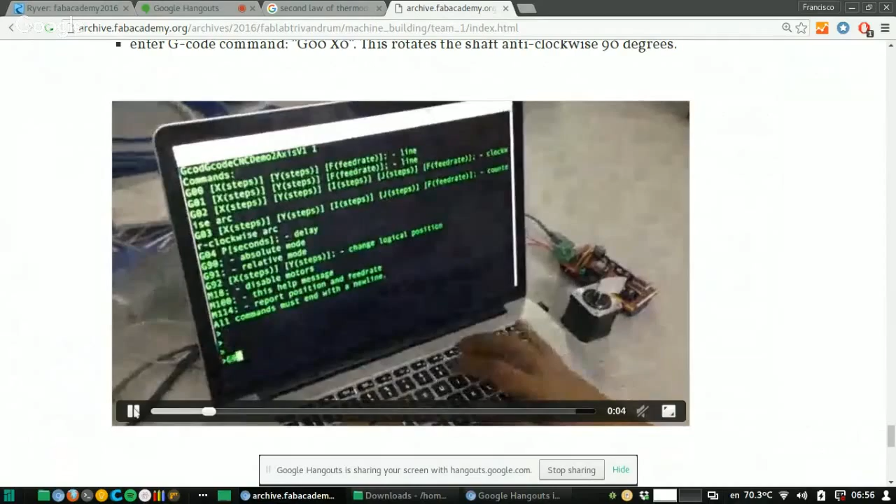No, the one you're seeing on the right is just us testing out the code that it works. The video on the left in Ryver is the one actually drawing the fully assembled machine.

No, this is my thing. You're executing G-code? Okay. No, Francisco, if you go into Ryver, just open Ryver. Open what? Ryver in Trivandrum channel. I've posted the MP4, the final MP4, which you can view.

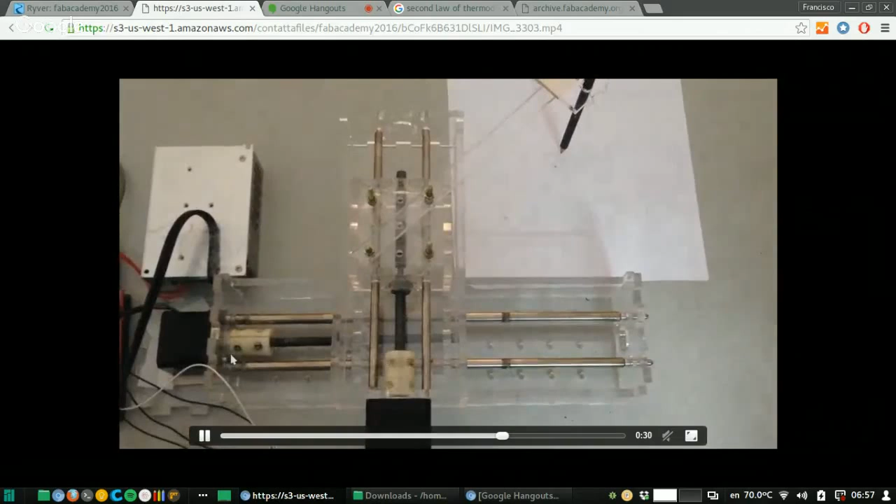And you can see faintly that it's drawn a square. So this is done through G-code. Yes, we got a G-code, and I'm driving it through a serial port.

Okay, that is good that you have this working like this. You can present this machine now. Okay.

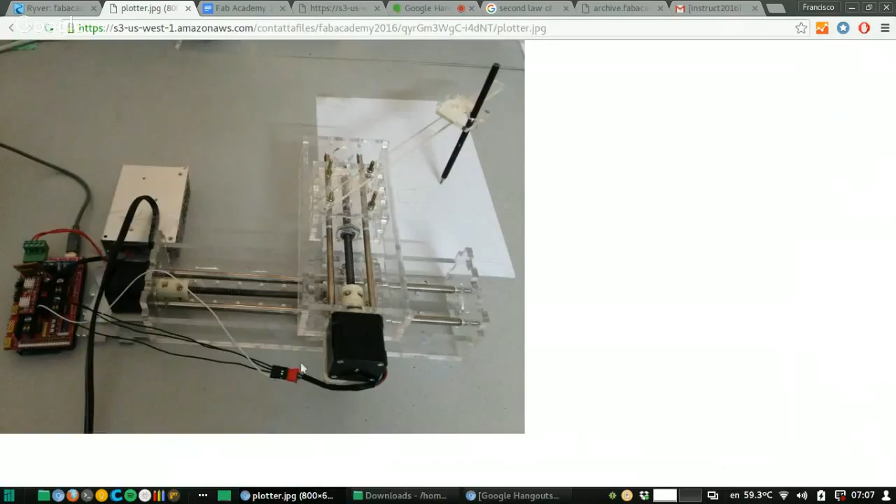Just one warning for this. There is a danger that you are going to fry this board. Why is that? Because you should never, ever remove one of these jumpers while there is power applied to the board. But because of how this is put here, it's very easy for one of these cables to come out, and that will make the driver explode. So please make sure you secure this in a way that there is no chance of accidentally removing this plug or these pins. Sure, we'll do that.

Is this acrylic chassis your own design? Yeah, so Sibu, Jasil, and Rashid did that completely in acrylic, their own design, done in OpenSCAD. These shafts are obtained from what? So they went to a scrapyard and bought scrap inkjet printers, and they used the guide rails from there. Okay, make sure you state that. Yep.

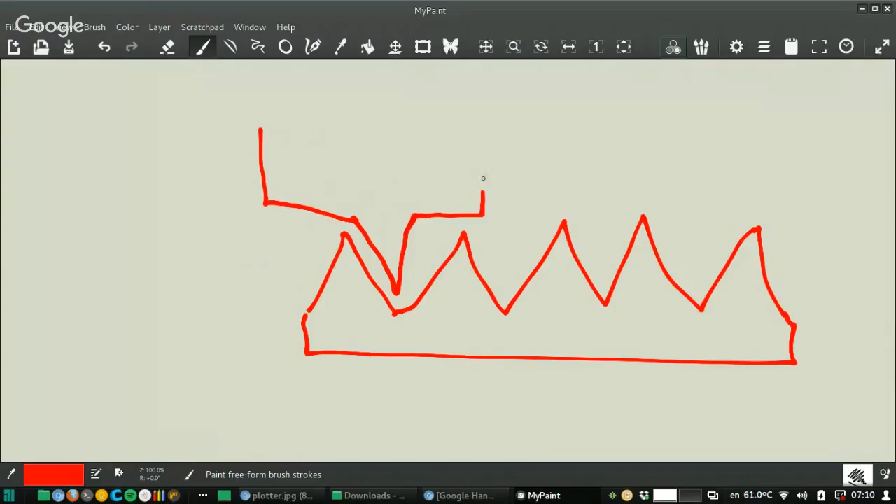How is the backlash? Backlash in the sense of? What is backlash? It's like when you move back and forth, it doesn't move the same distance. There is a certain loss of distance -- it doesn't stop at the same starting point.

Yeah, it's because of this. When you move this way or this way, it's not touching at the same time here and here. So when it moves from one side to the other, you are losing something. Right, so it's actually surprisingly low.

The square that you saw being drawn actually ended up at the origin. If you see, the last point is at the origin, so it's actually done a reasonably good job there. Most of the problems we were having is mostly with the way we are attaching the pen to the arm, and that's a bit loose. Whenever that moves around, it kind of messes up the drawing, but otherwise it's actually holding okay. The tolerances seem okay so far.

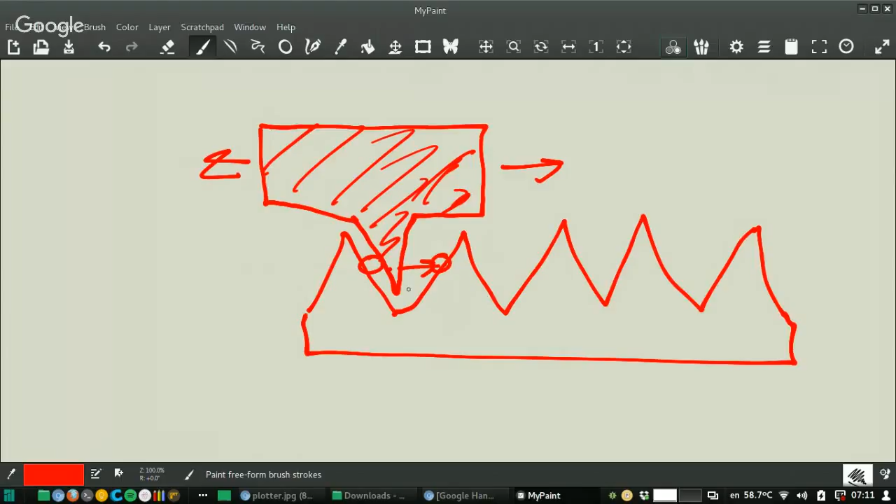Yeah, but with that you cannot measure backlash. This distance is small. Okay, so this is in the teeth of the nut of the rod. How do you call this in English? Yeah, the nut, right, the nut. This is the teeth of the nut.

This distance, if you want to measure backlash, you tell the machine to move this distance. Say you want to do this square, but in the middle, you tell the machine, in one of the sides, to move 100 times this distance: go one back, go one back, go one back, go one back, this distance only. And then you continue to do the square.

And then this will not end up here. Will end up here, meaning here. Because when you do this 100 times, this is not moving actually. Only this is moving, but the other thing is not moving.

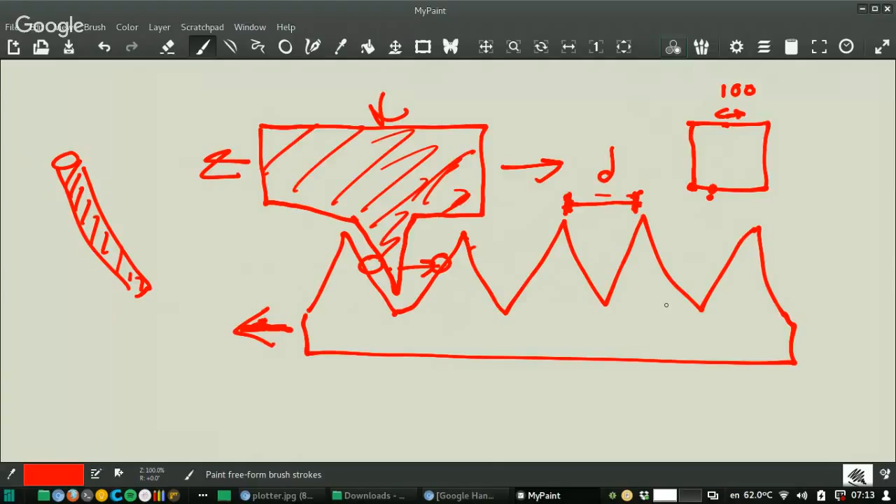Got it, so you're saying the tolerances between the nut and the screw have to be perfect so that it rests on both sides, and maybe it's not. Okay, we'll test that and see. Sorry, I explained it wrong. This is the rod, so this is moving, but this will not be moving. Right, correct.

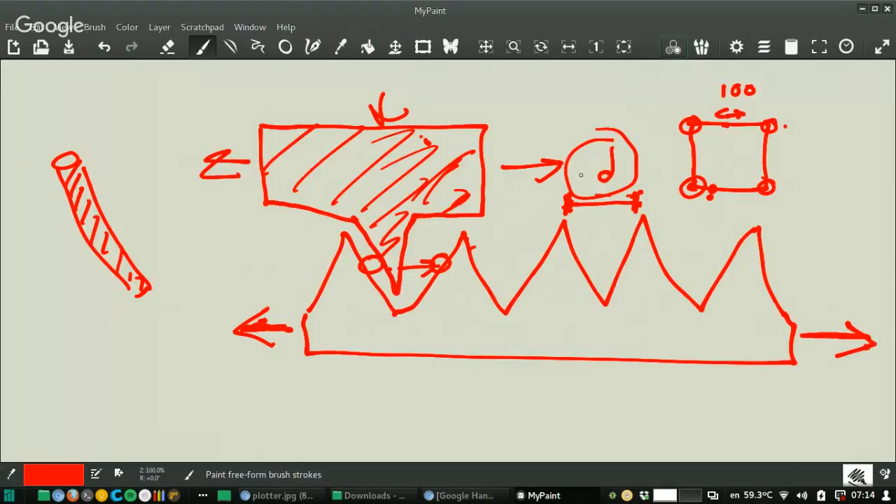Okay, that's a good test, I'll try it out. It must be something that changes a lot in direction, so you can actually see this problem. That's why they have this.

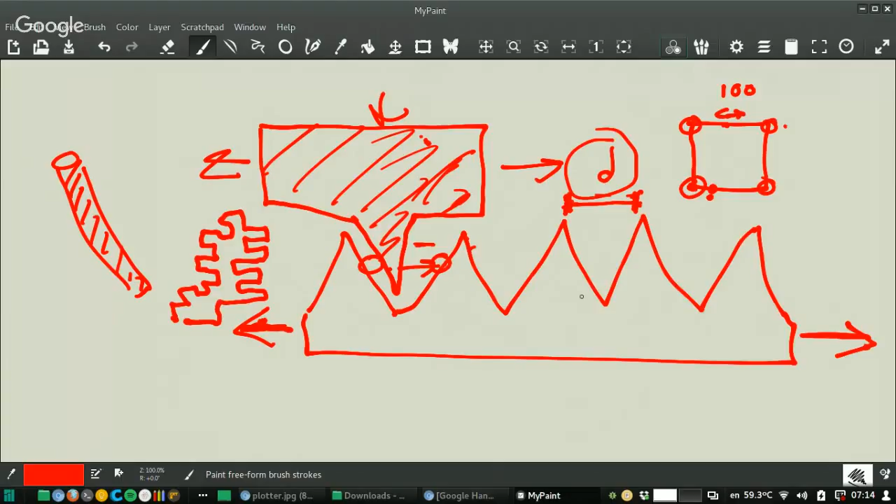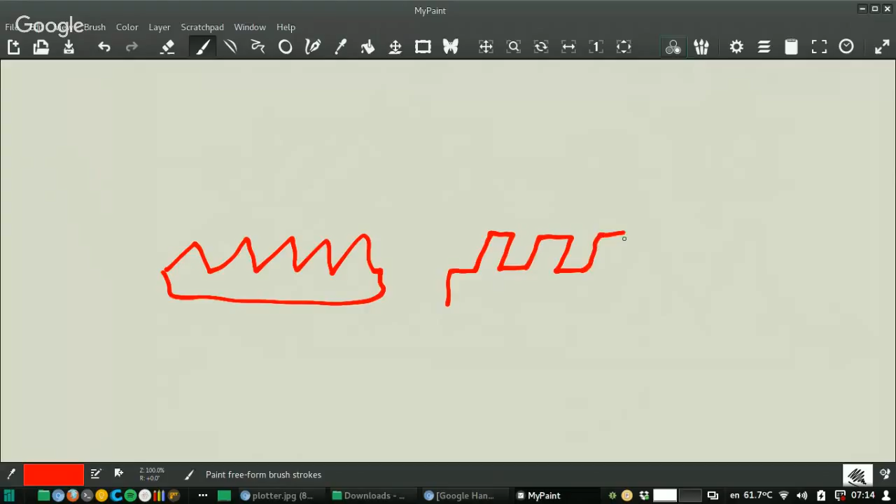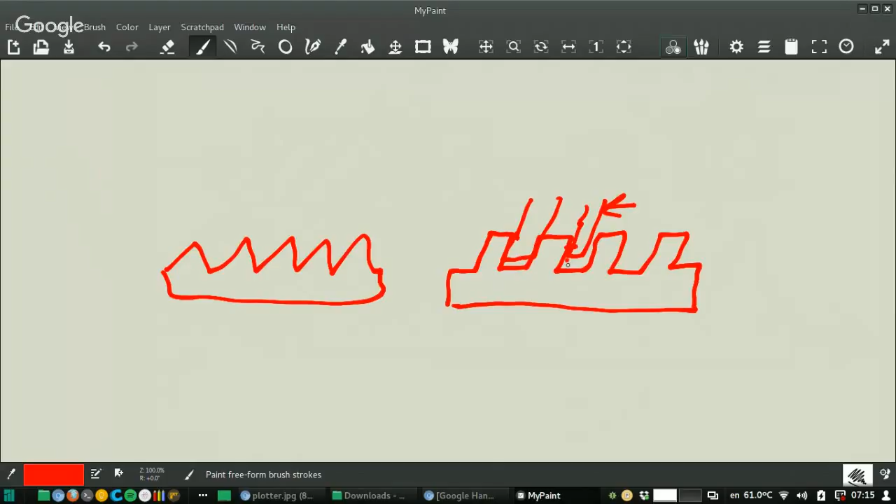You are using this normal rod here, but there are these more expensive square rods that also come with something that is pretty tight, and also for the mechanism it has a spring, so you are always in contact, it's pressing here all the time, so you always have contact to one of the sides, even if you change direction. Got it, that's good to know.

But this is the expensive solution. The good solution would be having here some kind of encoder that we will see in input devices, like an encoder, that even if this is not moving perfectly, you are at the same time reading where your actual position is. So it doesn't matter where you are, you force the machine to move until you reach, if you want to reach this point, until you reach this point. Even the good thing of digital fabrication is that it can correct errors. Remember, this is the goal of digital.

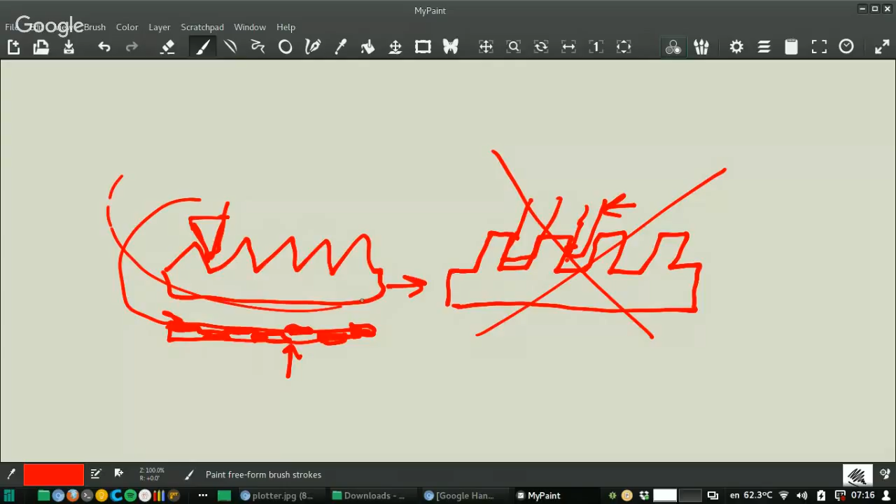So are you saying using some kind of sensor to see where the position of the nut or the screw is and then adjusting accordingly? Yes, like a closed feedback loop. Yes, that you can have a very bad, very imprecise machine, acting as precise as this one by using this kind of input device. Okay, what is that called? That input device? This is an encoder. Encoder, you know what that is?

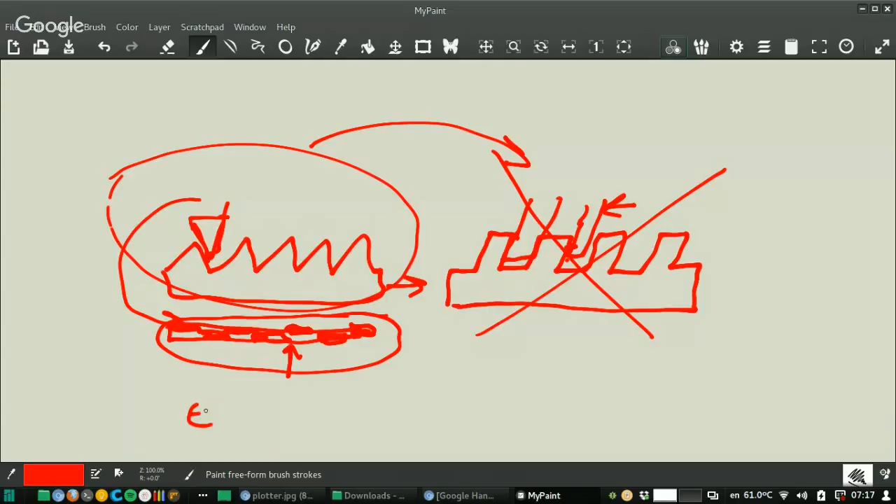You worked with it before? There are, you will see later this afternoon, or evening for you, linear and rotary encoders. Okay, I'll explore that some more and see what that can do. So is this a mechanical encoder, or encoding IC? Is this a mechanical encoder or what is it? Jasil is asking.

This one that I'm drawing here is an optical encoder. Okay. I mean, you can, with the parts you have in the inventory, print this in a normal inkjet printer or laser printer, not laser cutter, a normal laser printer, black and white pattern, and then use the electronic components you have in the inventory to read what is white and what is black.

Okay. You can also do this with a Hall sensor with large resolution, and you can also do this, yeah, I mean, in your machine. So one thing I understand, so you're saying that you take the printout of the black and white squares or whatever, and then where do you place that? I understand that you can have an optical module which looks for those, but where do I place that strip?

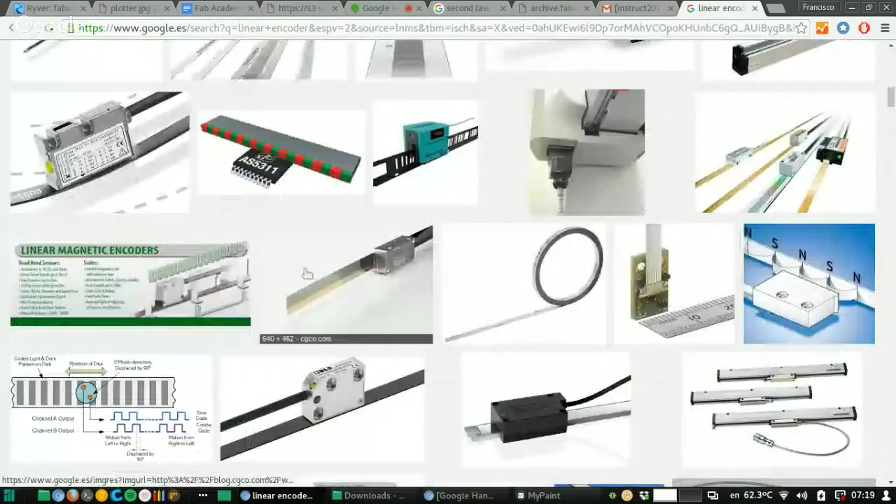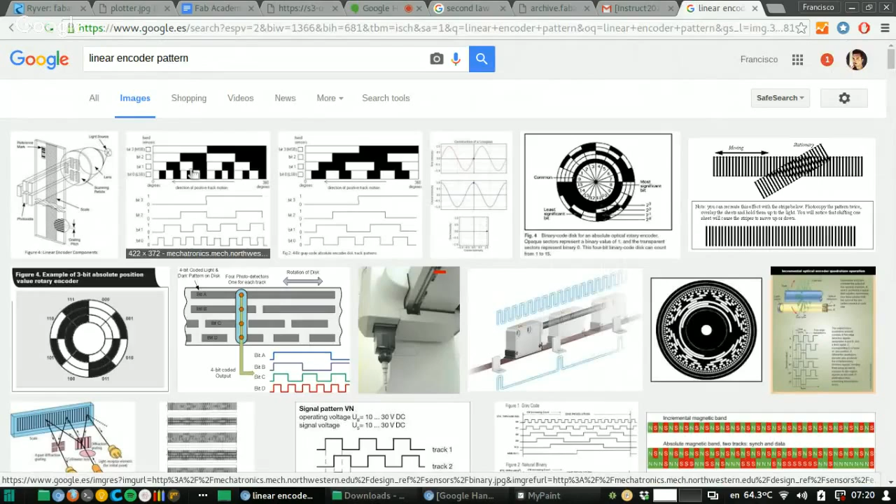This is a good idea. I think we saw an example of this in that shaper tool which Cebu had sent a video of, which had these strips of patterns and yes, this is like a linear encoder. The thinnest you can make this. So then with an interrupt, you read every time it changes from white to black. You trigger an interrupt. You remember when you made interrupts?

Yeah, of course. So you trigger an interrupt, and then you add the distance. You know this distance between white and black and white and black. So you say, I have moved this distance, and you can take counts of this. Nice. There are then more complex patterns like this one where you can actually measure more things. But in each of these lines, you need a sensor. So it measures if this is white, this is black, this is white, and this is black. Then I am at this position. Got it.

But the best thing is to start with this to get the program working with this pattern. And this is for the linear thing. Another thing is measuring the backlash, and there are procedures on the internet to measure backlash. If you can measure this in the X and Y axis, then what happens is when you measure something, it is no longer an error, because you already know what the error is. So a known error is not an error.

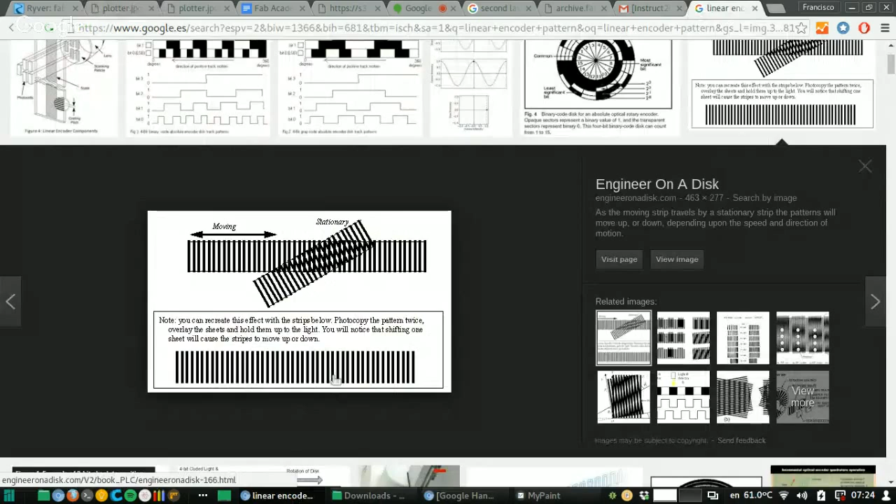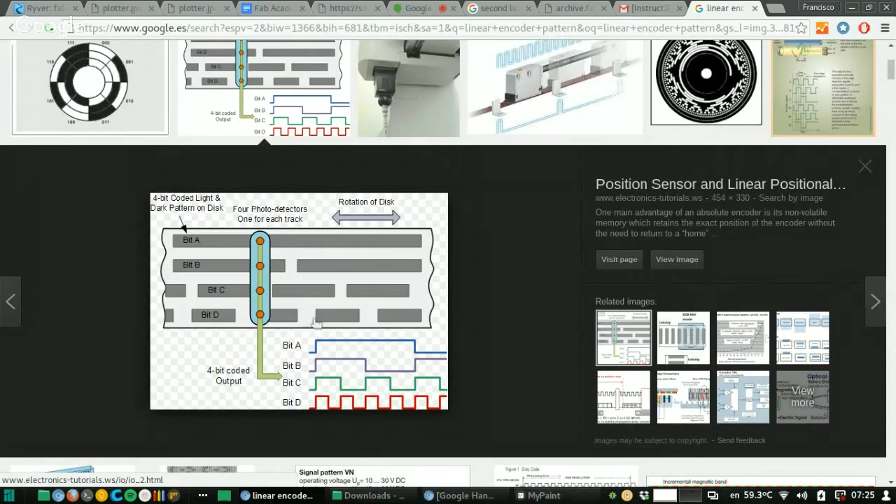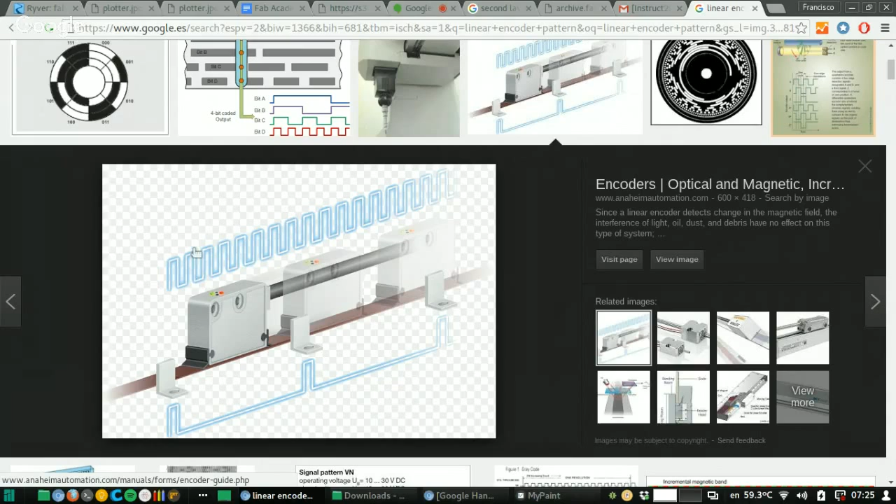So that's why you incorporate later more complex designs, more complex patterns. But for a starting point, if you can program this for input devices, here it's like the 4 sensors you can see for different patterns. So you can measure these 4 bits, and this is the result you obtain: 1 0 1 0. So at every change here, you are at the edge. You can measure the falling edge and the rising edge of the input. Right.

But this is for next week. These are things that you can incorporate later for machines or for whatever you want. And this is very important. But there are many input devices. So if you take advantage of this week, it's going to be a very long week with a lot of work.

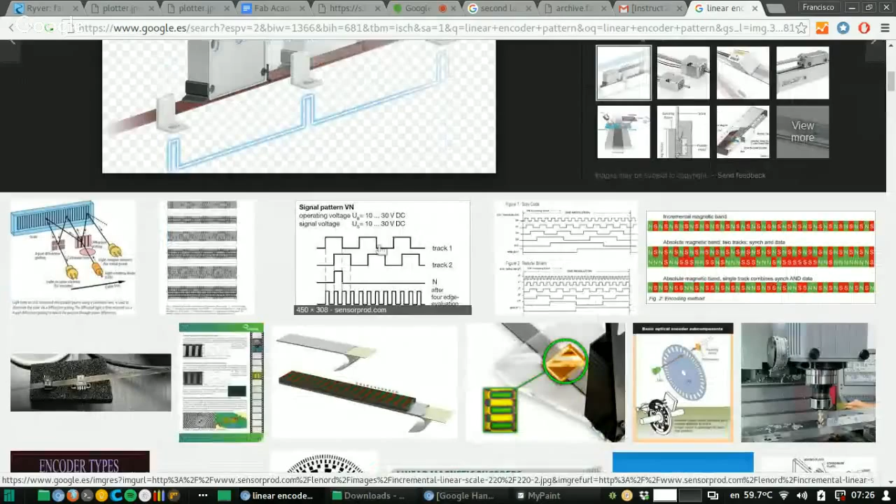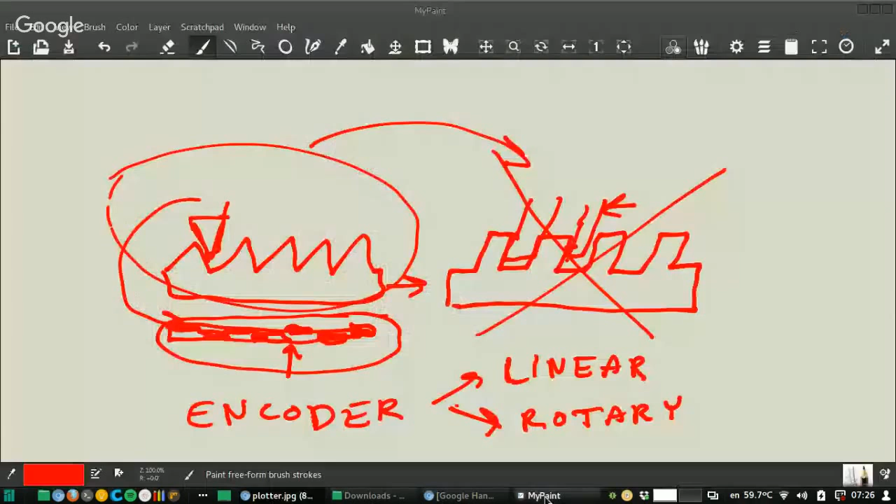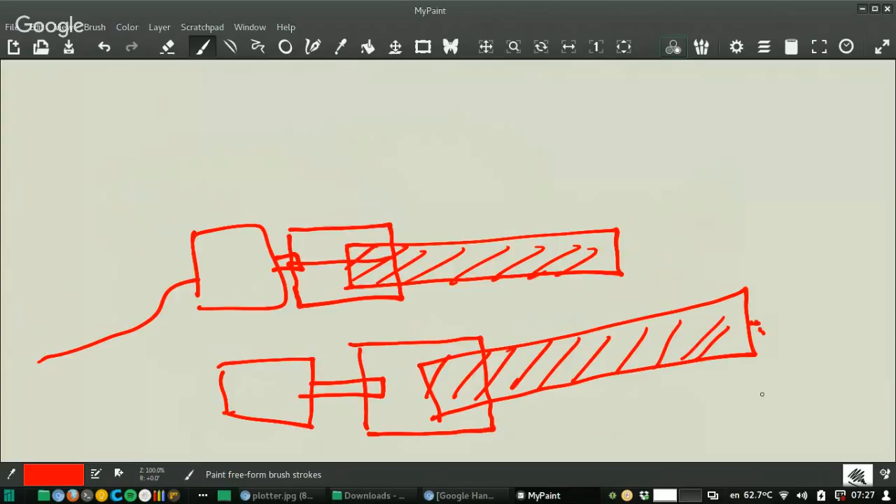But the problem is, in reality, I'm going to make it very exaggerated. In reality, when you couple, it's going to be like this. So you will realize that this end of the rod is not just turning. It's moving in a circle at the end. Have you noticed that? Maybe very little, but it's not that noticeable.

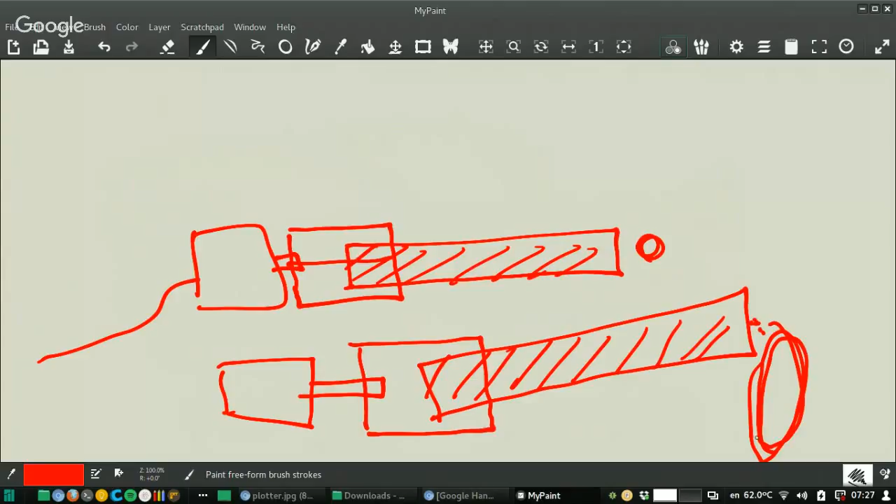Yeah, this is very exaggerated. But this is never just twisting. It's moving like this, because this axis is never parallel to this axis. Whatever you do, it's never going to be parallel. The probability that you make it parallel is 0.

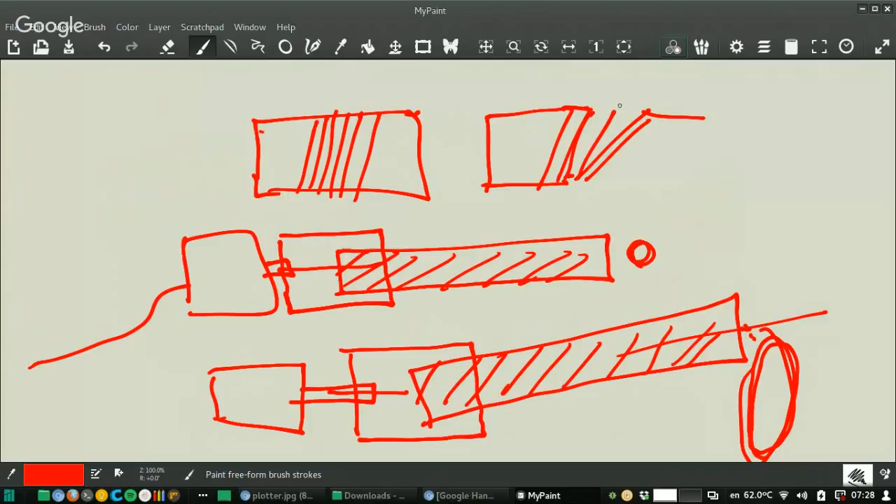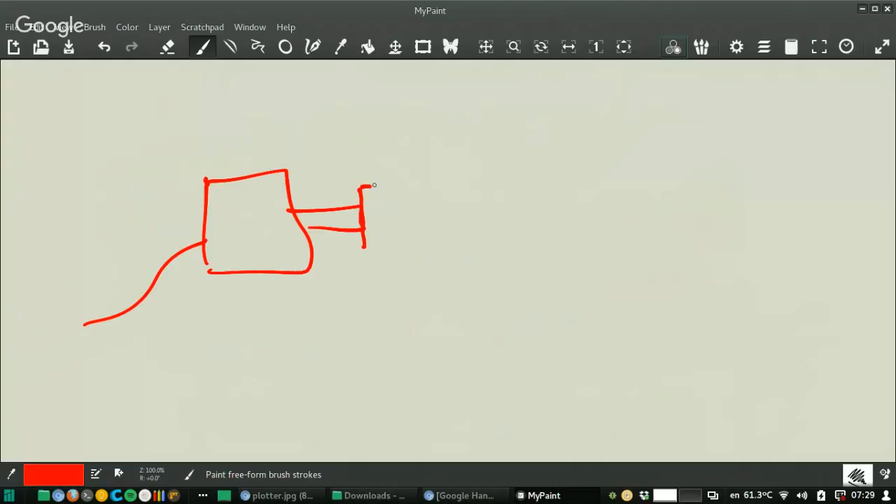This is your stepper motor. This spring will move in a way that makes this parallel. The spring is going to convert this into this. The spring is going to bend, so this becomes parallel again. I haven't seen this, but I'll take a look and see if that is an option.

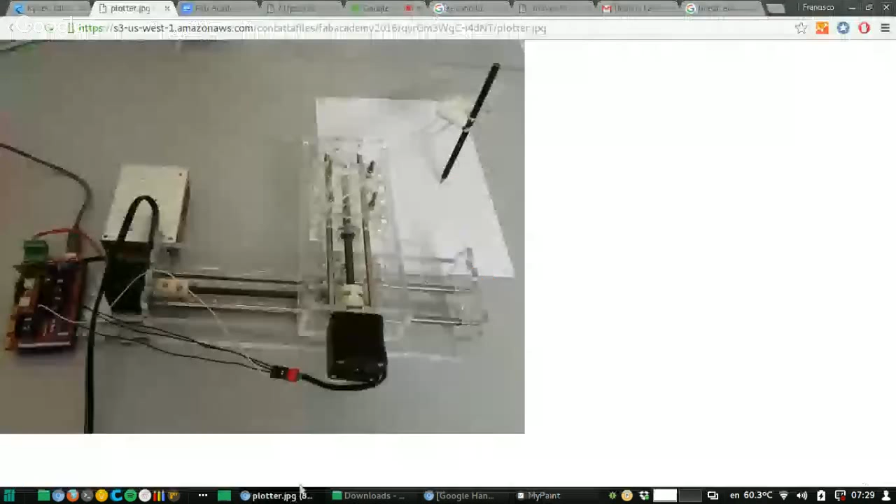I don't know if there are Thingiverse spring couplers. Is this one? Have you ever seen? I mean, all the machines have these cuts here. This is for things to become parallel to the axis. Yeah, I was not aware of that. That's interesting. But I don't know if in Thingiverse you're going to find it.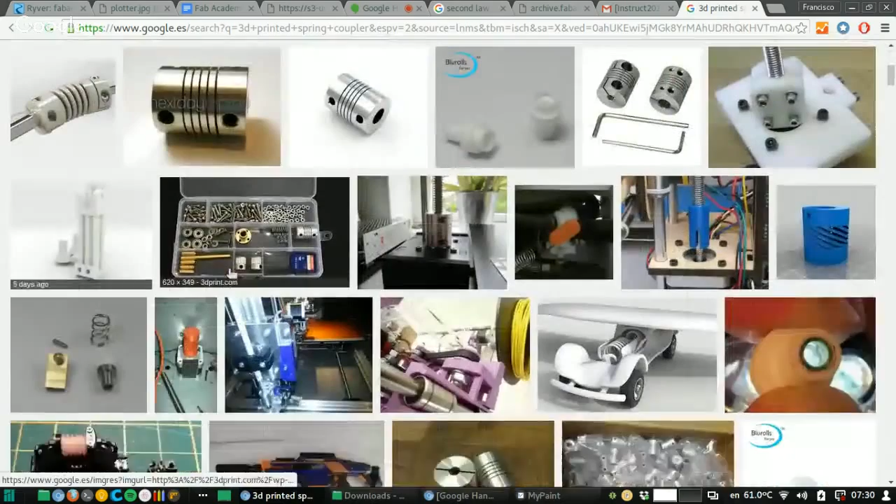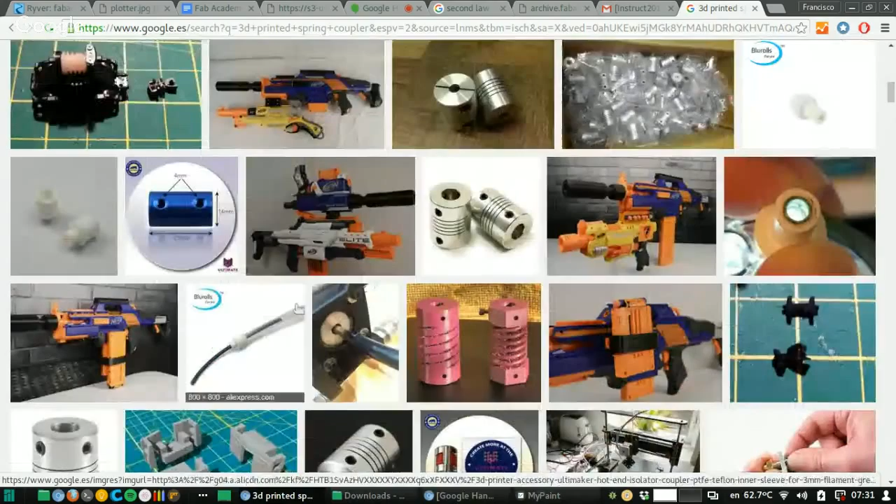No, it's very difficult to print this, but it could be nice. Oh, just look here, someone tried it. Because you have to print this in one piece, not in two, like the one you have printed. Correct.

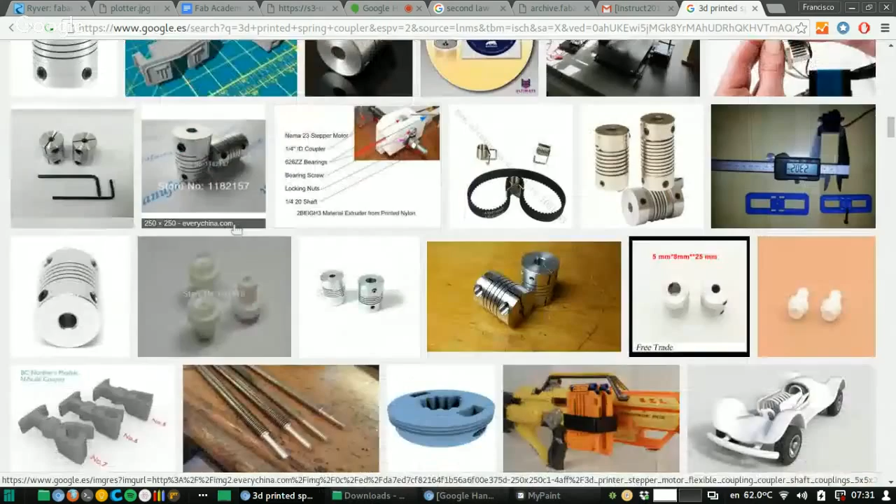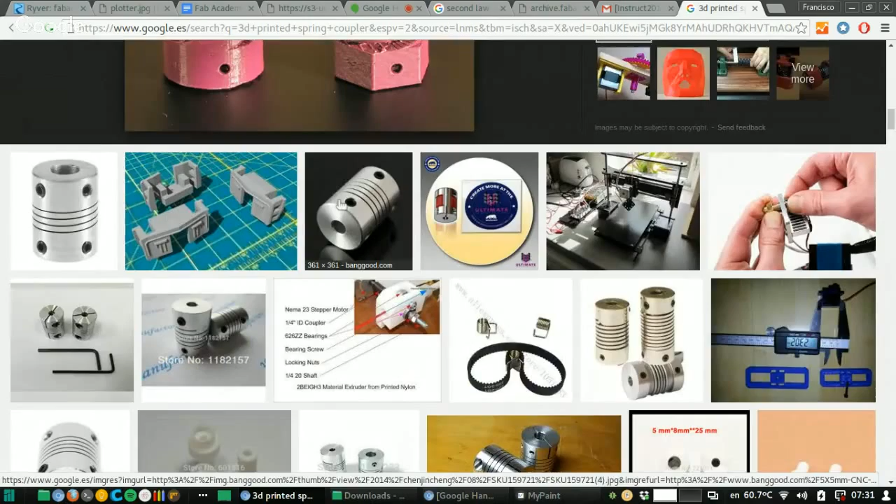But if you manage to do the design for this, now it is going to be useless with PLA. But it doesn't matter, because when there are metal 3D printers, and there are going to be very soon, you will be able to design any kind of mechanical part, if you have the ability to design. That's why designing is very important.

So I had a separate question about the group activity for this week. It's okay for people to divide themselves and focus on specific areas, right? For example, Shibu did the mechanical part, I did the automation, and others helped with different areas. I didn't get a chance to really work on the mechanical part. So that's okay for this week? Yeah, that's okay.

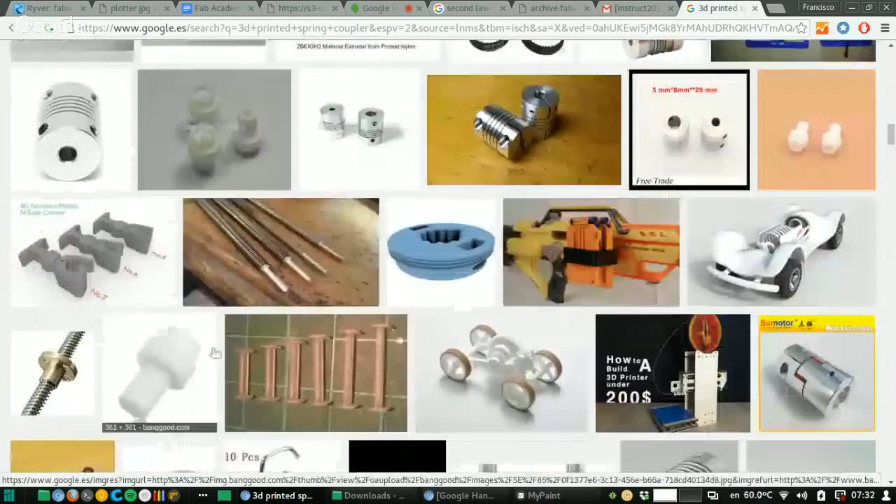That is not okay if you are doing a group final project. Okay, that makes sense. But for the mechanical assignment, the group project, it is okay to divide the work. But be ready to tell who did what.

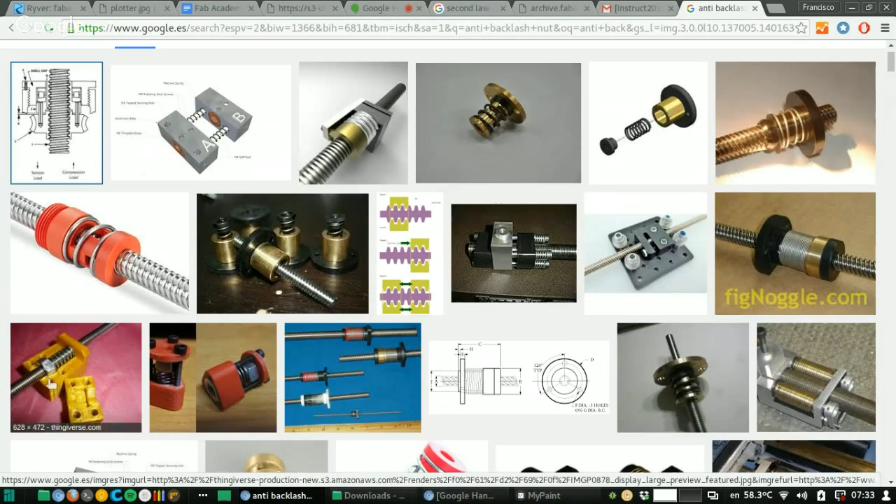This is the thing I was telling you, that it has a spring to make sure that there's always contact. Some people are also designing anti-backlash nuts, something like this. You can improve the machine doing things like this. You add a spring, you see? So there is always contact on one of the sides.

So even if you move from one direction, it doesn't go to the other part of the nut. It just stays there because there is a spring forcing it. All of these are things you will be improving when you are doing machines. If you want them to be more and more precise, you have to add things like this. Anti-backlash for every axis, then encoders. This is the spring coupler. All of this increases the precision of the machine.

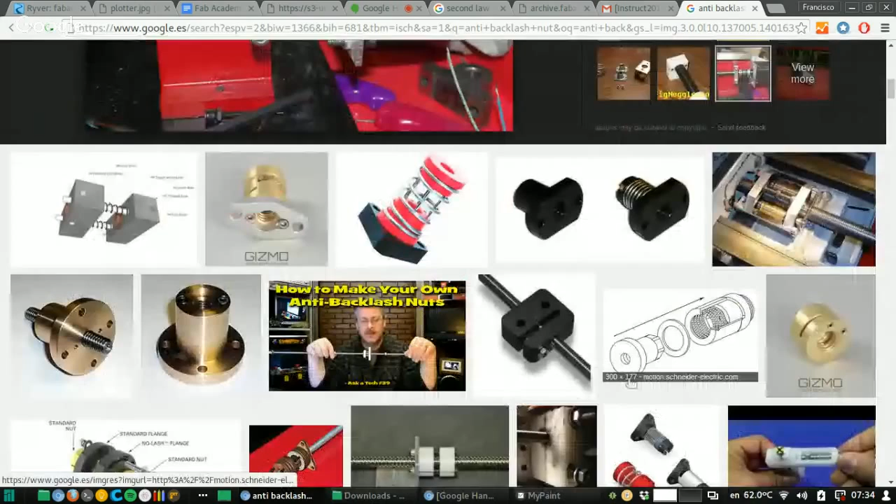Then, so you are presenting now. Yogi, make sure that you put yourself here after Shanghai. Remember. Put yourself where? Sorry. Yeah. Here. Yeah. I'll do that. Yeah, absolutely. Got it. I'll put a link and everything. I'll add some documentation also. Yeah. And also add the link. Yeah.

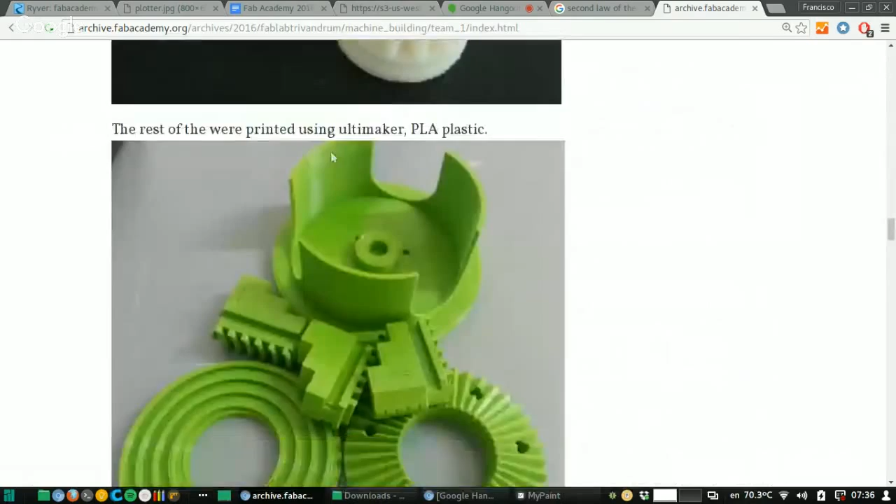And then who's going to speak up? I'll be speaking. Okay. So prepare the pitch, like, this is a continuous pitch. He's gonna be scrolling down from your machine, and you have to tell the story as he goes down. So you have to arrange this pitch so he can scroll down, and during these 5 minutes you tell the story. Okay? Sure. And then if you have the video, you can put the final video at the end to show the machine moving.

I thought I'll just put a summary, about 10 lines at the top, which gives the highlights along with the video, and then the details will be below, so that he can get a quick overview of it. Yeah, but he will be interested in the whole story. Not only about the machine itself, but also the group. How do you divide the work? What problems did you encounter working in groups? All of this, all your experience. Not only the machine. Okay. Okay.

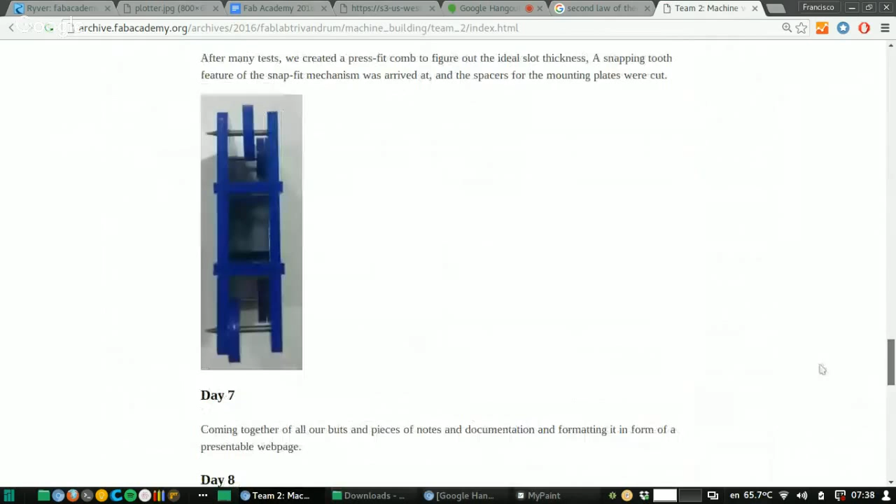And team 2. Okay. Yesterday, you remember there was a problem with the archive. Did you experience that problem? No, we don't have it today. Okay, the archive is fixed now, but the server in the archive ran out of hard disk. Yasil, do you have a clue why this is happening? The hard disk on the server, the Git server, why did it happen? Yeah. There are messages here.

Yeah, Yasil, this is because the server is storing all the history. So if you push 175 megabytes, it's gonna be there forever. It's very difficult to remove this from the history because it was made for keeping the history, not deleting it. So be very careful: before you push, check the size of your folder. Okay, sure. Okay.